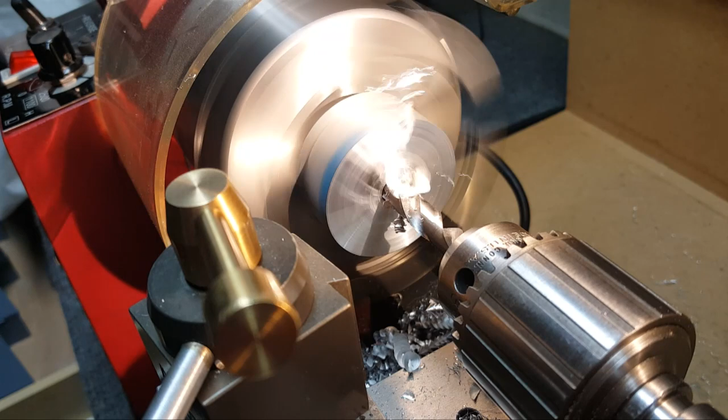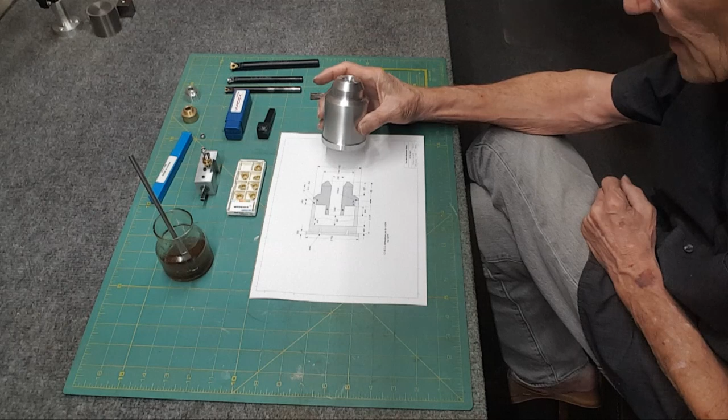Rather than my traditional opening where I'm sitting on a stool talking to the camera, I decided to do this on the bench. Long project, I'll tell you, 3-4 weeks or something, but I'm thrilled how it came out, and I love how the seam just disappears the second you close it.

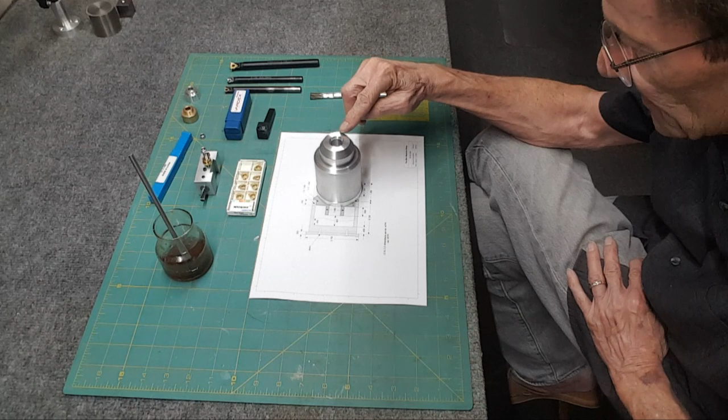So pretty thrilled. It's very heavy, doesn't knock over easily at all, and I do plan on putting the top part back in the lathe because I want to angle this whole piece out here, since I can see some wild pieces sticking out that when you put it in there, it's going to get some oil on the top surface.

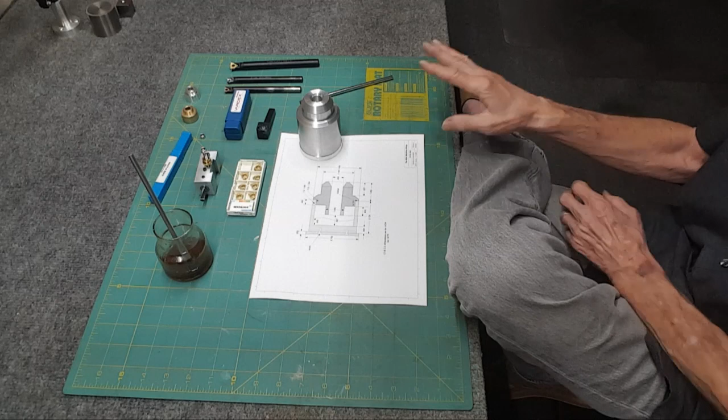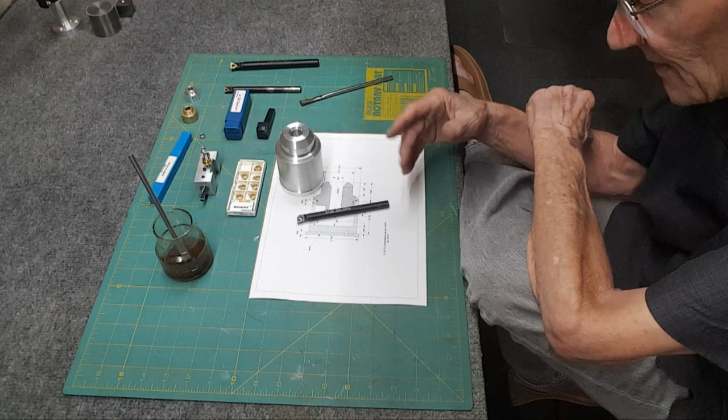It was a fantastic project because of the learning curve in doing this. I had mentioned I didn't have anything to do deep boring with, so I bought complete sets, buying everything because I didn't know what was what. This is the only tool you need.

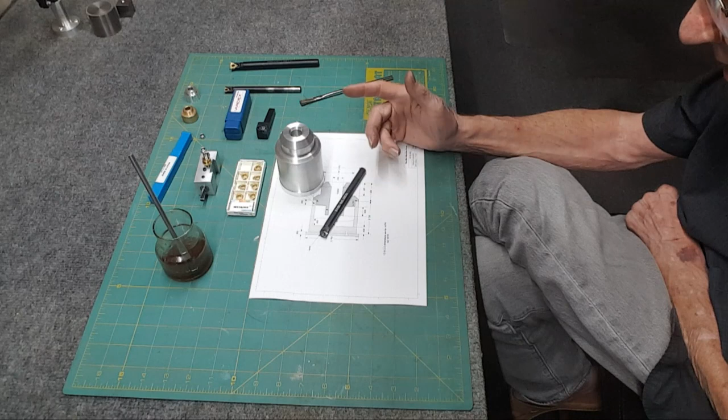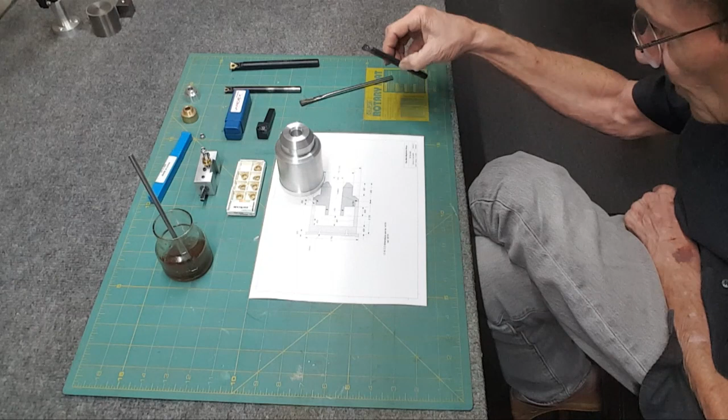This is the 10mm. It holds all kinds of different 2151 size inserts for aluminum, steel, everything. So this was a great find. S10K-SCL-CR06. So all the other sets and pieces I have are going to go into a spare tooling drawer, or maybe possibly needed for a future project.

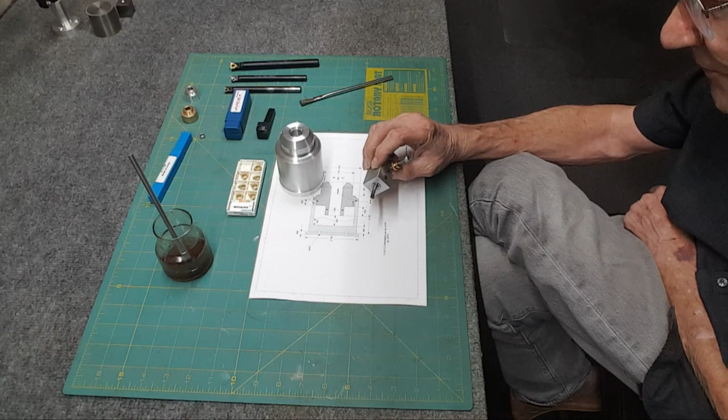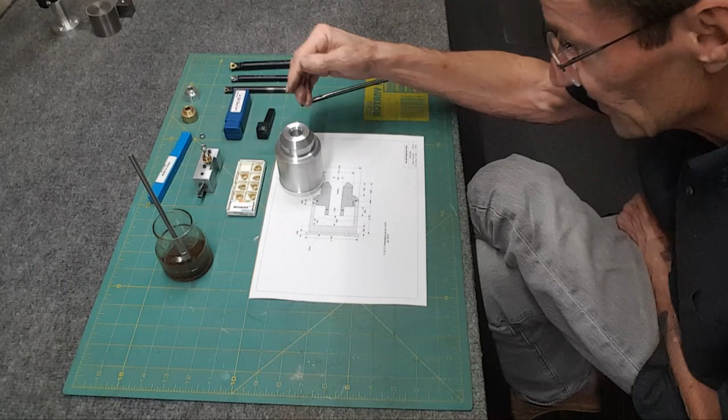This guy could not find anybody to do inside grooving. Wound up making this myself on the D-bit grinder. Turns out I had to go back in and do some more on the relief for the threads, had to go deeper because the top was longer. Looked at it just by sight, happened to hit the magic angle. It works beautifully. So wish I could find an off-the-shelf tool to do that with, but I hadn't been able to find one. What else?

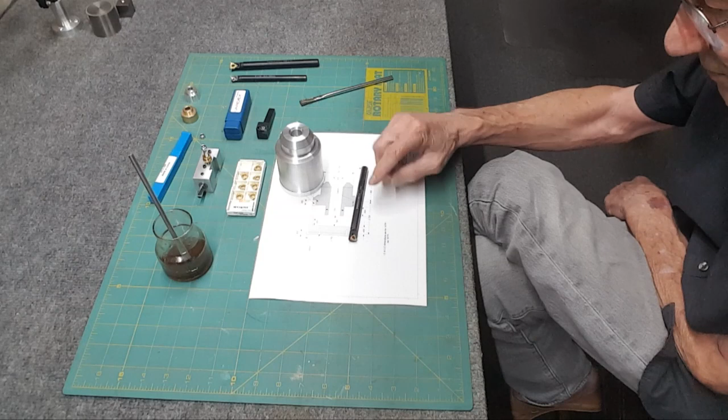The threading stuff, I screwed up. Like I said, 14 TPI, I didn't have a tool to go deep enough. This is the one 10mm tool, it goes in both, but it doesn't go very deep. It does work beautifully though, I've used it, and it does perfect threads. Couldn't find anything to do the 14 TPI.

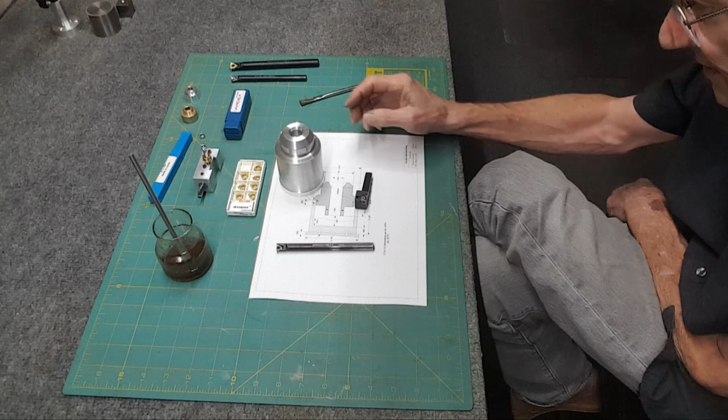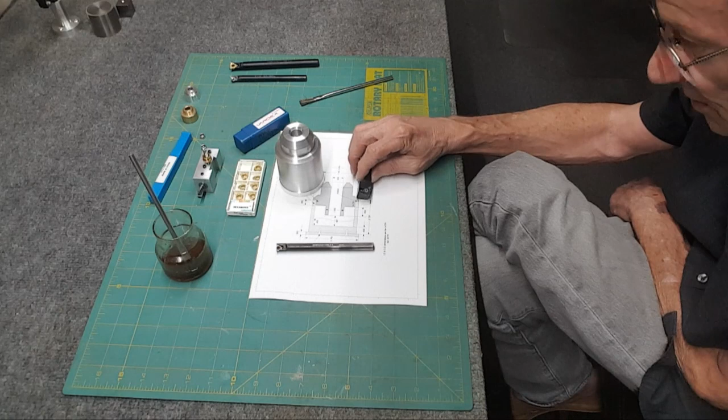Wound up buying a very expensive insert on eBay. The company Vardex makes the insert, and I found a chart where this is the holder for it. It's an AL 3/8 inch-3. Not happy with it at all, 80 bucks. You look at the hole and it doesn't really line up. I just kind of made it work. Doesn't do very good threads at all. I did have to modify a holder, not here, to get far enough back to do this large diameter.

So I kept looking, and I believe the 16 ER, the AG60 just means it's 60 degrees, which is a no-brainer - both metric and imperial threads are 60 degrees. But this is a 16, there's an ER and an IR. IR means internal right hand, ER means external right hand. This is the internal IR 16, IR AG60, and it should go down to 8 threads per inch.

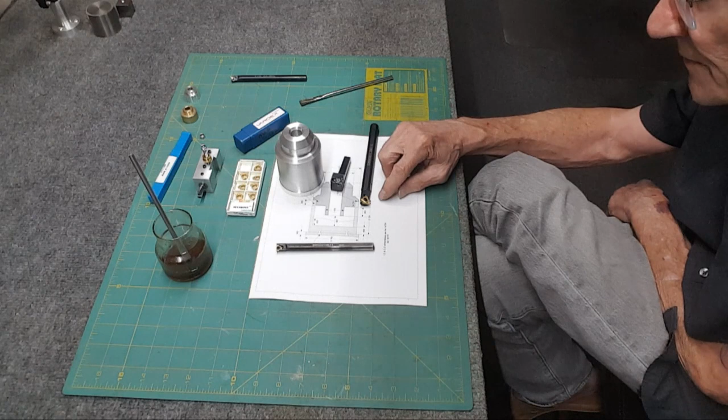So giant bar, wish I could find something smaller, but you can see this insert is huge. So not sure if I'm going to send this back. I do have on order some 16 ERs, which I'm hoping fit in this holder. If it does, I'm done, I'll just keep it. If it doesn't, I may send this back because, like I said, it's a lot of money. I can find other holders for the 16, but the shank is huge.

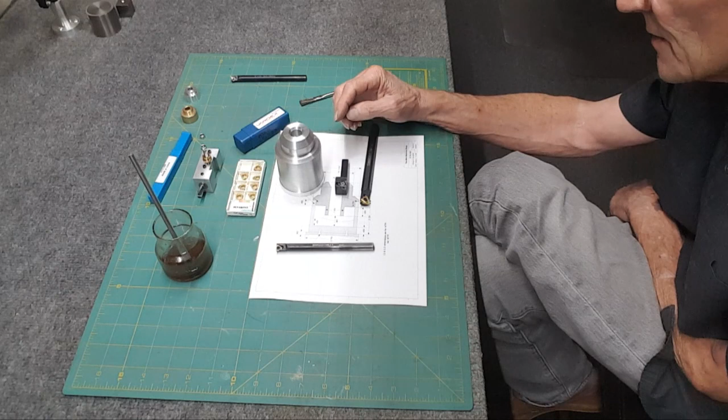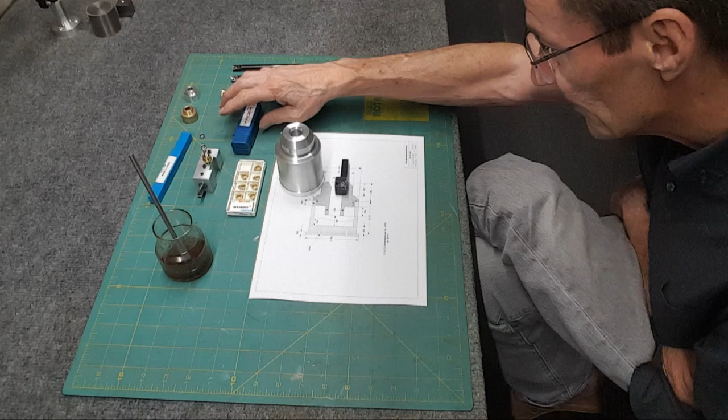So if I find the shank's hardened, then I got to soften it so I can machine it down to a small size, and that's where I'll go. But so project was great, learning curve, and hopefully I'm going to come out of this with a lot more - not a lot, but more capabilities in the shop for future projects.

Kind of cool. I may put some rubber or something on the bottom of this. And of course your wife's going to make a comment going, huh, said I should have put a flat on this so it won't roll off the counter. Go figure, never thought of that.

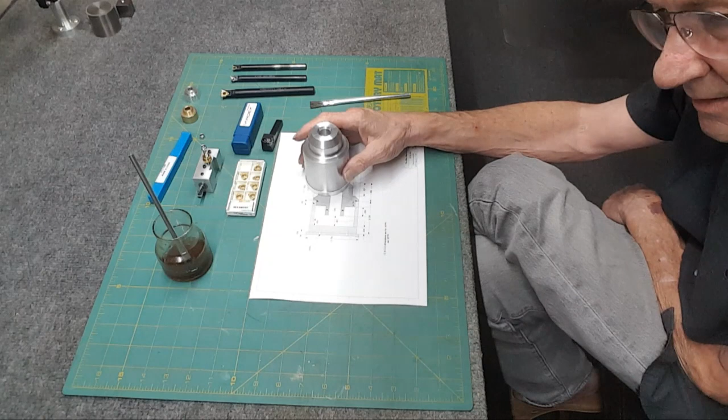Anything else I need to say? Not really. So, rest of the video, you're going to see some of the machining, finishing this guy up, and how I did it. So, hope you enjoy.

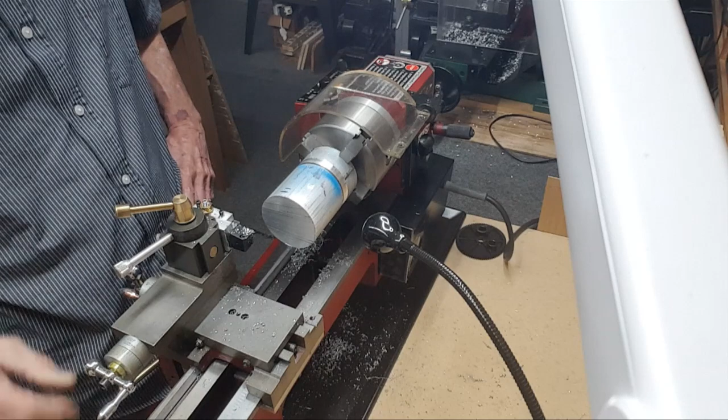First up, I'm not really that thrilled with this insert. And I realized that plate that I took off of this thing stays on, the insert goes on top of it. So I had to modify a holder to come far enough back to clear this part to thread it. Wound up taking some half-thousandth cuts at a time. Finally got it to go on. It's a little rough threads, but geez, no play at all. So I need to shorten it up a bit because I'm bottoming out in this thing here.

Ooh, that little piece of shrapnel here. Oh man, I'm ripping it off. Oh well, be careful with that.

Yeah, I think it was, I don't know, we'll see. But finally got someplace and I can finally take this out, turn it around and do the other side. But boy, was this painful. Took probably an hour to do these threads.

I guess onward and upward. And I've learned to leave it in there, just think about what it is because you might want to do something else. Got the other jaws in there cleaned up. This guy needs to be 400 thou here.

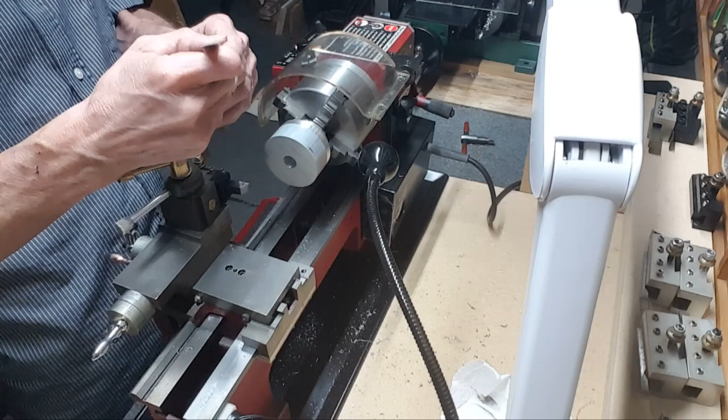Whoops, wrong way. Here, that. Wow, that's way up there. So I'll be putting the saddle stop in place. I need to face it off first, so bring the compound back.

Let's see how out of round it's going to be. Not bad. Ooh, got the feed still on. Oh, I put the gears all back in place. Put the cover back on it.

There, I love these thumb screw things. Makes taking this back on and off so fast. Done. Okay, so now I'm ready to go.

Bring it back out. My chips are gonna fly everyone. Ooh, I max out. So I need to tilt it more. That much. Yep, that clears. Okay, re-engage.

Give it a little bit of RPM. Don't touch it. Oop, there we go. Oh yeah, chips are gonna fly. So I need my shield again.

Boom, there. Alright, will that work? I guess, huh? Should work. Yep, it stops the chips from hitting the floor. They just hit me instead. Yep.

I'll tell you, it's times like this you wish you had a really bigger lathe to take that down. You could take 10, 20 thou cuts. So I got it down to the print, what was it, 1.750.

Now I'm trying to do 45, find out this can only go to a 40. I could, well, the scale only shows 40. I could take it to 45. But this is the tough part because you have no fine feed.

You're just manually kind of turning the wheel a little bit at a time to come in. If you go too much, it makes a mess. And I might actually make this steeper than a 45. We'll see how it goes.

I'm not sure how long it's supposed to be. I guess since the print's to scale, I can see where I am here. Wow, these pieces are long. Look at this, this is like ridiculously long pieces.

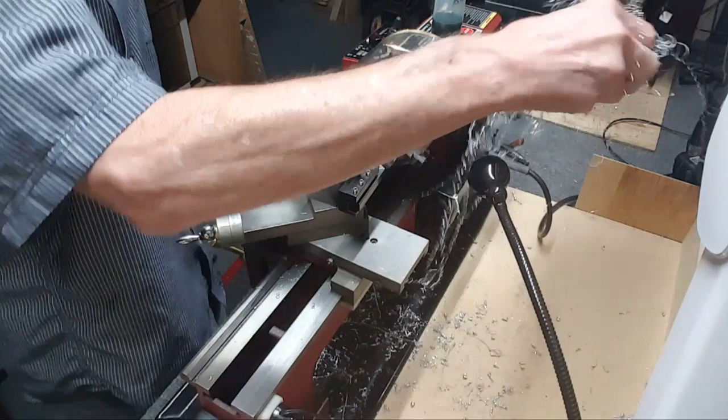Get this all in the trash can. Let me measure what that is on the print. There we go, I want this.

Print says I should be 0.4. I'm not even close to that, right? Yeah, I'm almost at 0.2.

So, because I want room to funnel this centerpiece with. It's kind of fun actually, doing a chamfer this heavy like this. Ooh, that was a heavy cut.

It's looking pretty cool. See some junk.

Yeah, I'm pretty sure I want this to be steeper than this.

So, just wanted to share some of that, do the rest of it off camera. Okay, changed this from 40 degrees to 30 degrees to do this outside. I like it better, back and forward rather than reverse, my famous boring bar here.

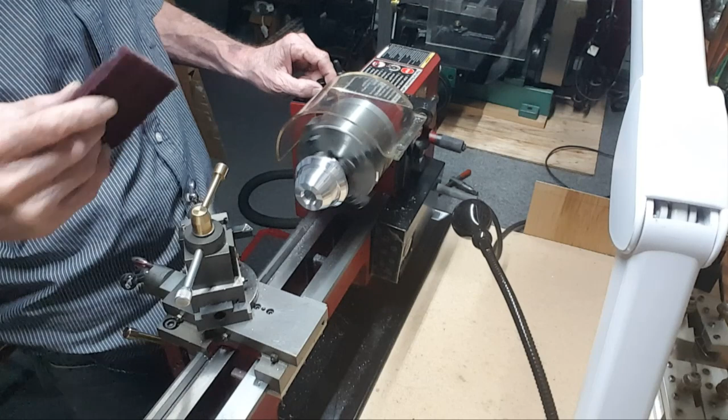Yeah, it's going to be some sanding going on. It's pretty nasty, but... 320.

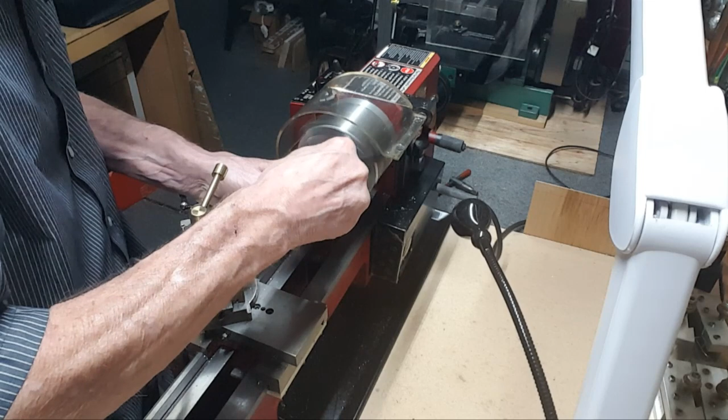That's making a nice mess of it. Yeah, I can always go over it again with something else.

Wow, huh? Well, we should have 1600 in here, right? 1500.

I don't know why that's not really doing much, huh? Jesus, that's nasty. Oil usually does some stuff to it, you know.

Alright, otherwise I just gotta play with this off camera. There's a bunch of junk.

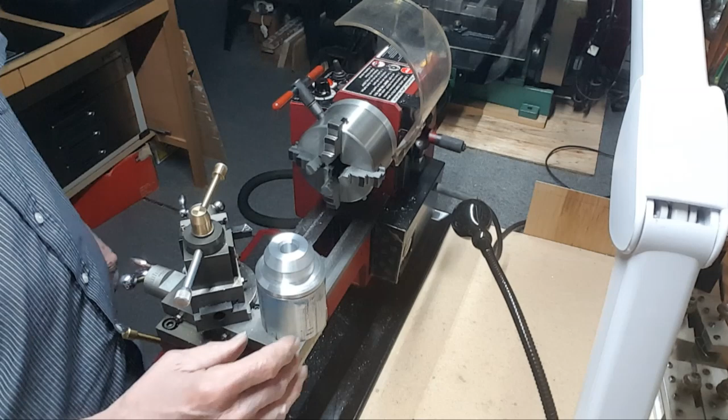That looks nice. So I should be able to grab it here, huh? Can I go far enough? Before all the... nope, can't go far enough. So I gotta do the other set of teeth.

But yeah, I'm pretty pleased with that sucker. That's heavy though. Alright, yep.

You're witnessing the last of this project here. All this junk building up in here.

Saddle stuff's in place. I can't capture this, I just don't have the depth to it. So I'm not sure how I'm going to finish this bottom off, other than unscrew the cap, turn it around, and just kind of finish it.

You'd probably go in and just tell there's a little bit of a ledge, and just say, well, that's it. Jeez, man, look at how long these things are.

So I'll be doing some final surface finishing off camera. Jeez, oh, it's getting hot.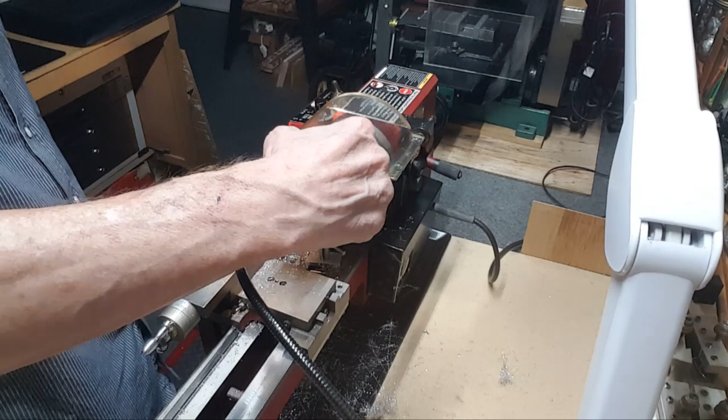I did put plenty of this stuff on there, right? Yeah, and I got quite a ways to go to get it to hit this cap piece.

So I guess this will be kind of the end of this project here, filming it at least. Ooh, it's hitting the cap.

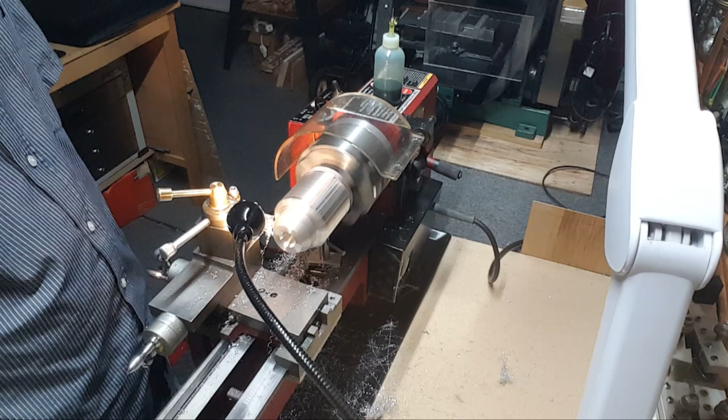Yeah. Just hit the cap.

Probably a couple of thousandths cut. See what it looks like.

I don't know what that mark is. That is a weird mark. Oh, turn the light off so you guys can see. Shoot. Oh.

Yeah, I think it's got to go more because I see something on the cap flashing where it didn't get hit.

Hey, yeah, sometimes you can get the swarf coming off in one long string, which is fun, so it doesn't get tangled all over the place.

Oh, gross. Hopefully it cleans up that one weird spot. I don't know what that was or why.

Oh, it's about to hit it now. Yeah, it's cleaning it up good. Okay, I don't know what that mark is about. Oh good, I got it again. Got it.

Shoot, ridiculous. There's the cap, and I think that was the final pass. It's got it all. Yep.

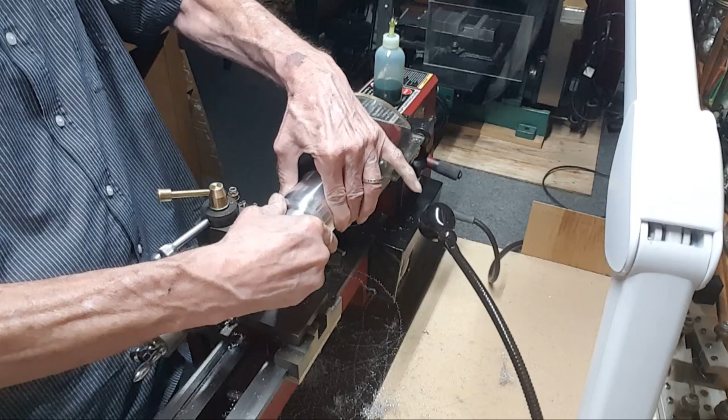I don't move this out of the way. Wait, it's not out of the way. That is. Oh, it's the edge.

Alright, well, that's pretty cool. So I'll just have to barely touch that edge. It's got some nastiness to it. Oh, there is junk in there.

Yeah, there's junk in the threads. I didn't completely clean all this stuff out. So, alright, well, finish everything off camera, but I'm pretty pleased with this thing.

Yeah, look at this junk in here, all in the threads. What is that? Oh, that's that thread breaking off.

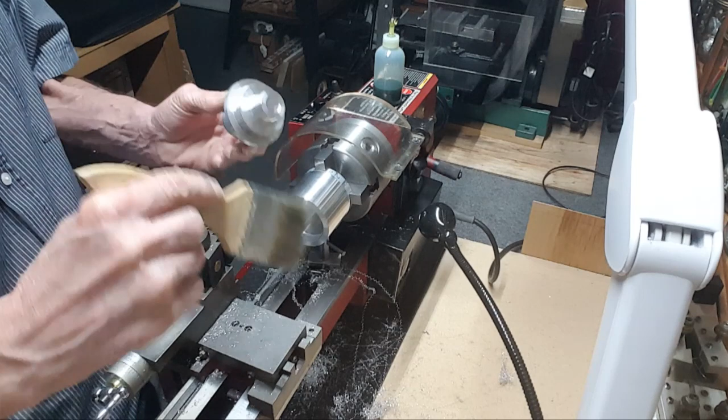And then these threads, turn it on, clean that out. Oh, and the grooving tool did a beautiful job this time. I just kind of eyeballed the angle of it, and it was just cutting like nothing. Alright, yay. Alright.